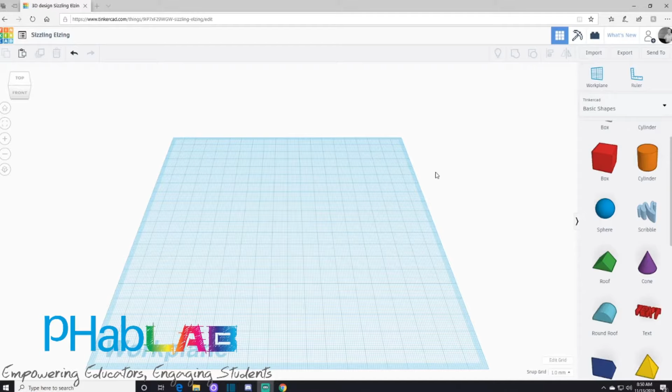First thing we do, as always, bring an object into our piece here. So now we have a square or a box on the workplane. What I'm going to do now is use the Workplane tool. I can either hit W or go to the top right here and click the Workplane tool.

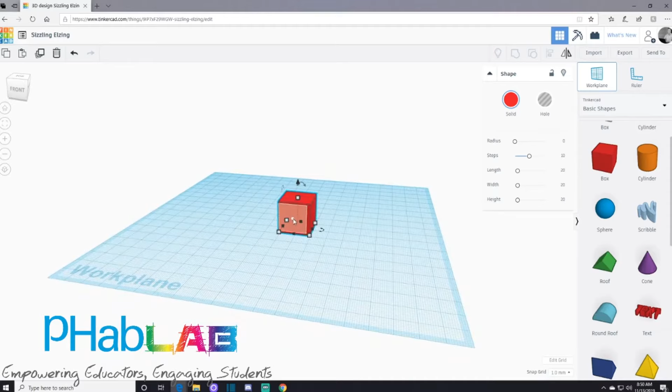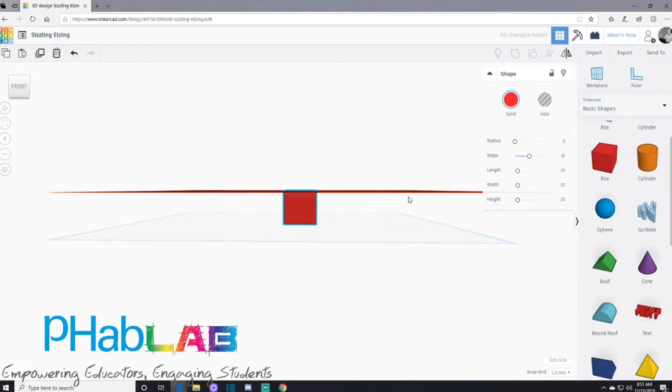This little box is telling me where my workplane is going to be placed. I can place it on the sides, I can place it on the top, and essentially this is going to allow me to perfectly place an object on top of another object or on the side of the object. For this, we're just going to do it on the top, and then go down on the view by right-clicking and moving my mouse. As you can see, I have two separate workplanes right now.

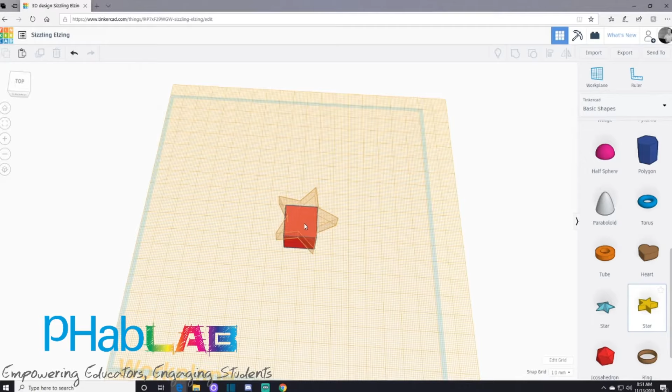First thing I'm going to do after that is find another object. Let's go with a star. So we're going to put the star on top of here, and now my star is perfectly on top of that box. We can play with a little resizing if we want to, try to get the star to fit perfectly in there. Awesome, so now I have a star on top of my box, not inside it.

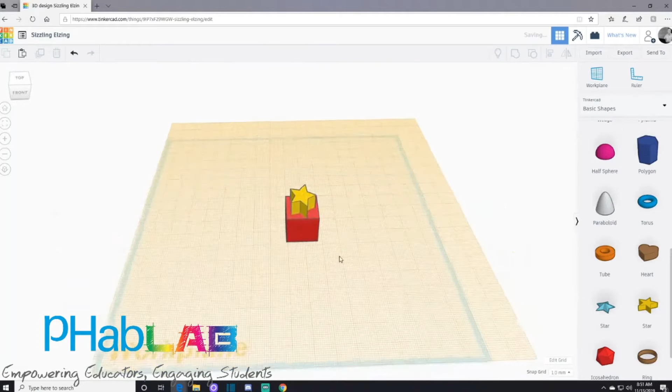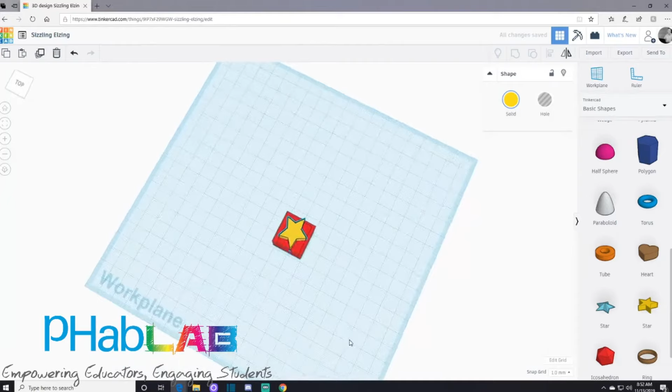So if I want to get out of this workplane, what do I do? I click the workplane again, and then click on my original workplane or off to the side. Boom, there. Now I have my object on top of the other object, perfectly resting.

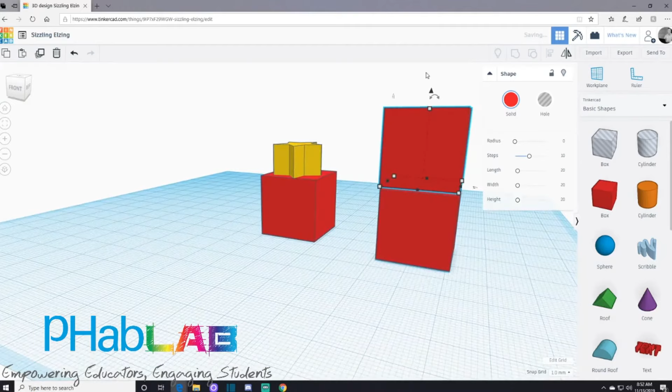Now, could you theoretically do this? Could I put another object on top of another object without doing the workplane? Yes, however it is a lot more tedious. So I'm going to pull this over here, and if you can see, I've got to get it perfectly down. What are some ways I could do that?

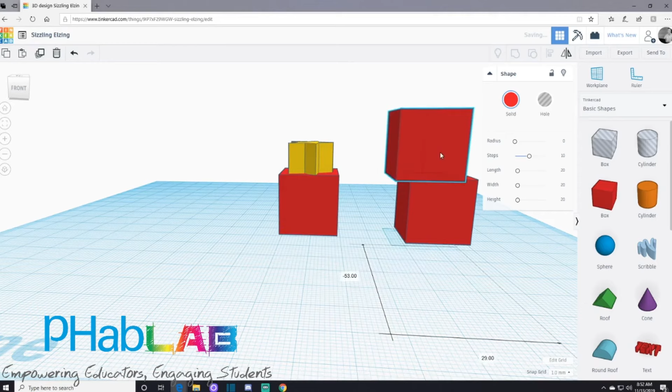I could measure, use measurements. So if I know that my box is 20 millimeters high, I can put a box in here, use my Z-axis arrow to pull it off the workplane and pull it to 20 millimeters. I get it there, and then I have to get this perfectly lined up. That took a lot longer than just doing the workplane, right? So you do have that option, however, if I'm going to make it simple on my end, I'm just going to do the workplane.

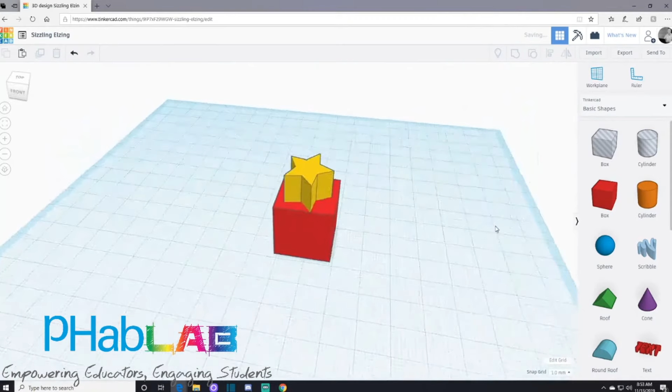So let's move on to a sphere. But you're going to have different objects. We'll bring a cylinder on as well because it's the same concept. So you can see the sphere and the cylinder are both blocky. They're not perfect circles, right? So let's focus on the cylinder.

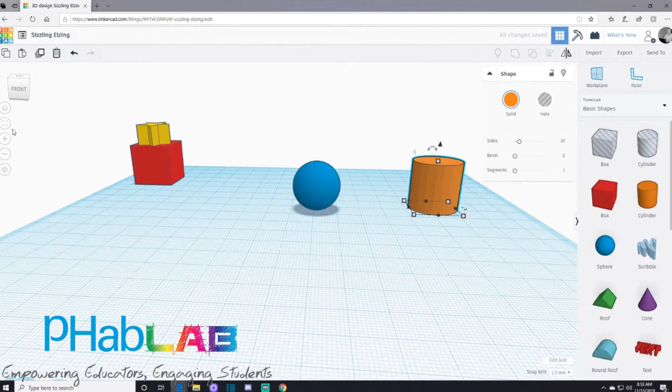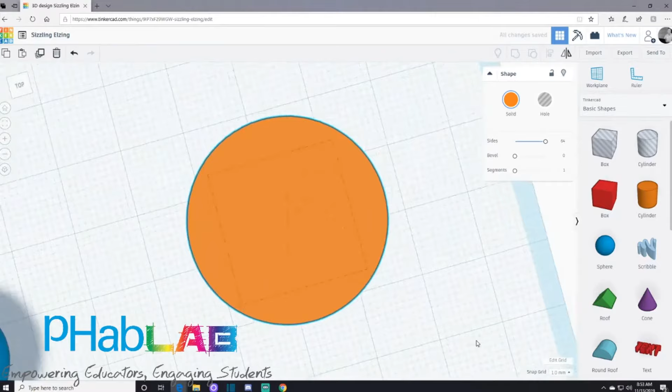For the cylinder, you have what's called sides. If I increase the number of sides, it's going to become smoother. If I go all the way up to 64 sides, which is the max, it's going to look a lot smoother, right? It almost looks like a perfect circle. It won't be a perfect circle, but it's close enough. That's as close as we get. Now if I go on the extreme opposite end, it's going to look very blocky, almost like the top end of a nut.

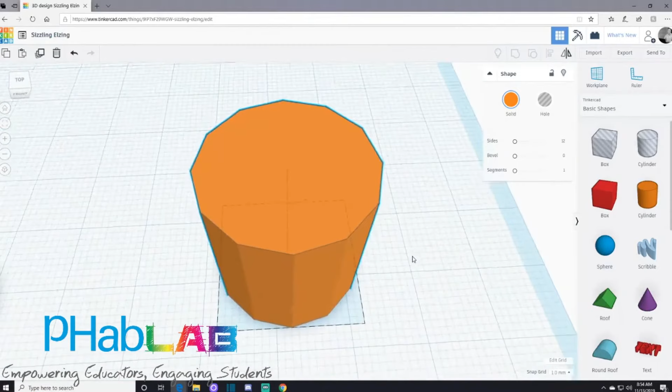Okay, so the same concept goes for the sphere. Except for the sphere, it's called steps. If I go on the extreme left and do 3 steps, this is what I get. If I do 24 steps, I get a much smoother sphere here. So keep that in mind when you're doing this stuff.

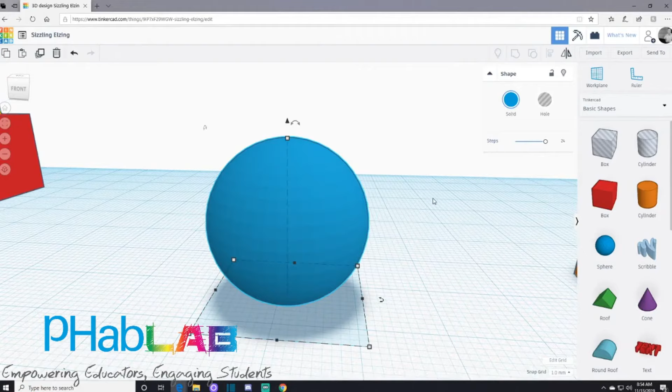So how does that apply to this lesson with the workplane? I will show you. I'm zooming out, and I'm going to grab my Workplane tool. Let's start with the cylinder. As you can see, I can get different sides of the cylinder, so you can see it flapping around there on each side.

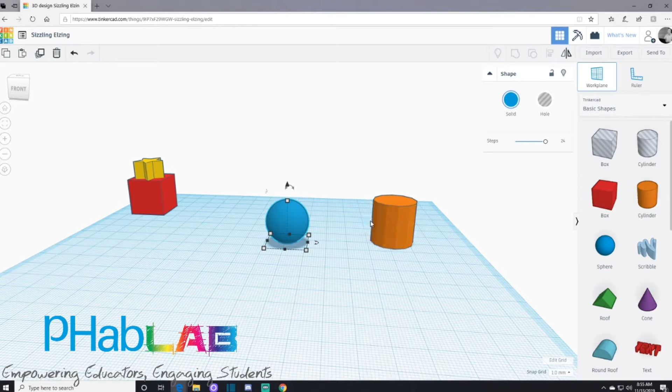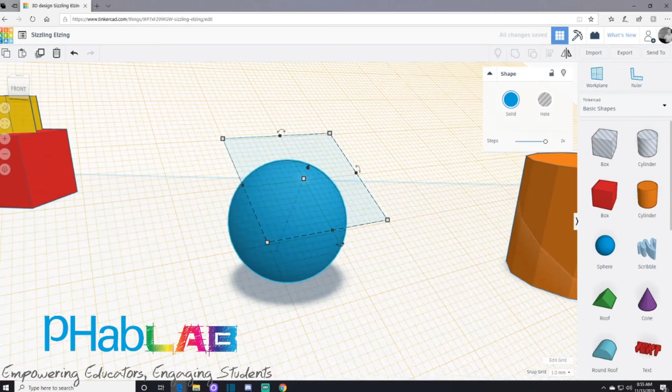Now imagine what it would be like doing it on the sphere. You see it's catching all of those steps, or sides, as I do this. So if I wanted to put something on top of here, let's just do something goofy like a cone. Okay, now I have that on my sphere.

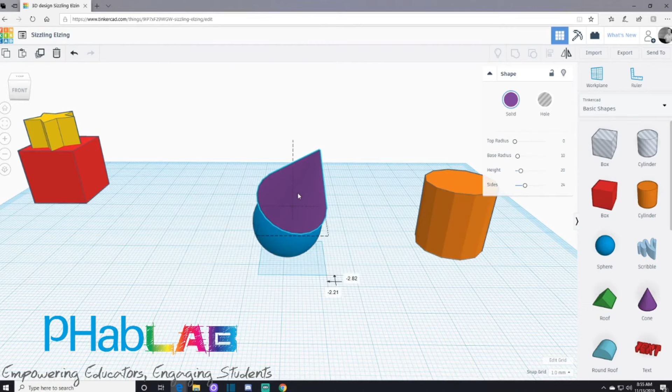Go back to Workplane, get back to the original workplane. Now I have a cone on there. What happens if I move it around? It is not going to move around the sphere, it's going to move on that invisible workplane that we have it on. So let's undo and put it back in its original spot. It is perfectly touching that sphere.

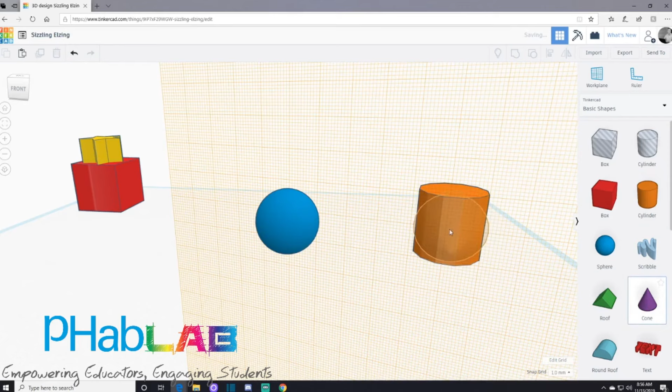Same thing would go for the cylinder. Put a cone there. And now I can move this cone up and down that workplane on the cylinder. Let's get out of the workplane, and we're back. So that is how you do the workplane movements on top of another object.